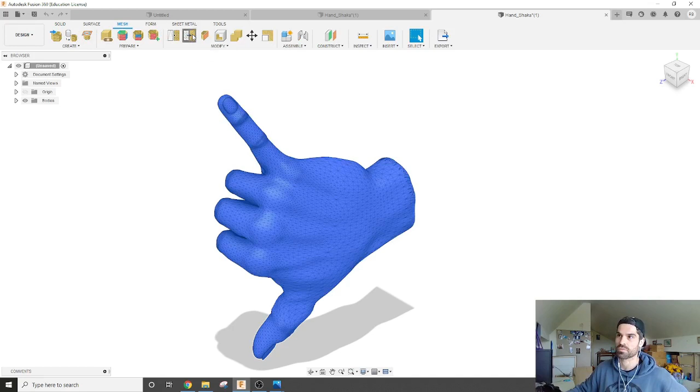So you go into your mesh, highlight the model, and reduce the mesh. Just from trial and error on the other ones, I found the proportion 17 works pretty well for how I want it to look—it kind of depended on the model a little bit. So there, I've reduced the mesh.

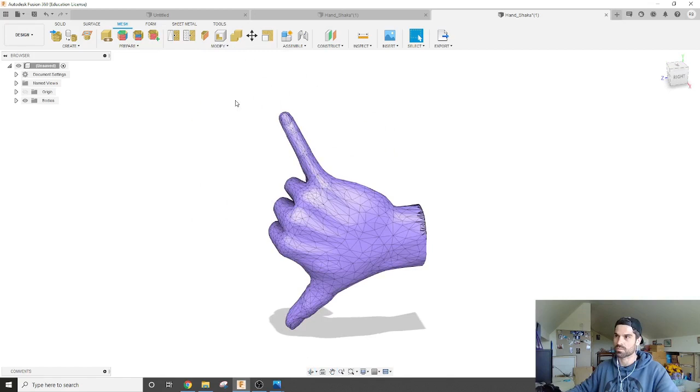We still can't put the hole in it or scale it to the size we want yet. First we've got to turn it into a solid body, and we do that by highlighting, modify, then convert mesh, converting it into the faceted body. You'll see the difference very soon.

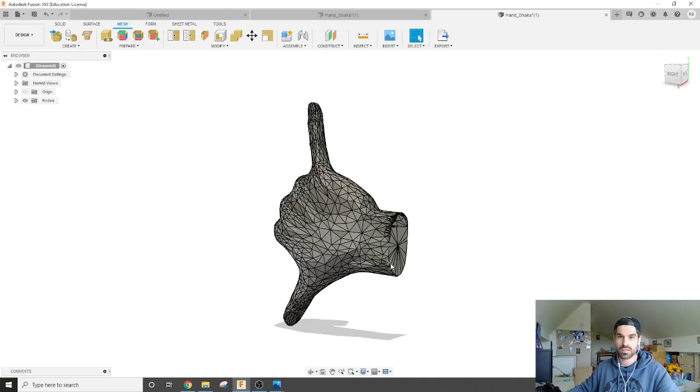From there we're going to scale it. At the moment that's our solid body that we could turn into an STL if we like, but I want to put that thread in still, and I want to make sure it's the right size. So you can just inspect and measure how big that is.

So it's 607 millimeters. With the peace one and this shaka fella, it was about 108 mil, and I know what that ratio is to convert it just from doing the math on it—not too difficult. I think it was 0.178.

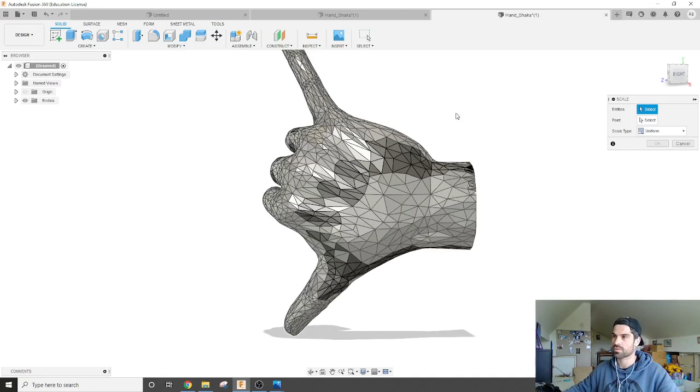So we're just going to scale it. We go over into our solid, modify, scale, select our model we want to scale. Then we're going to go 0.178—that's the size we want to scale it to for this one.

And if we do that measurement again, we get 107 millimeters, way closer into the ballpark of what we want. So that's all cool, leave it at that.

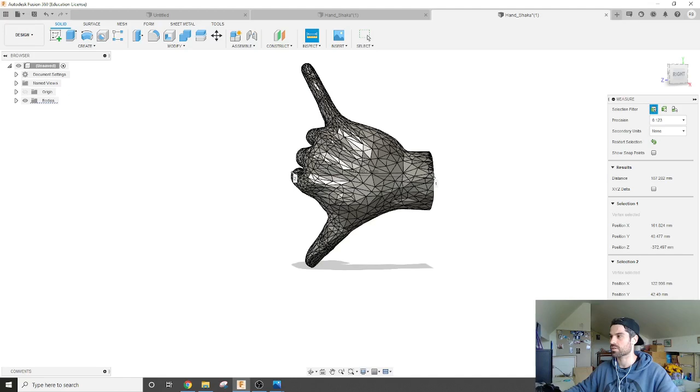Next we're going to put a hole in the base here for the thread. We go into our hole, select the center where we want it—you can move that pretty easily. Oh, my head's in the way, hang on.

So we've got a unified screw thread. I know it's a 3/8 for these taps, and we're going to go in 25 mil. So we've got our thread there.

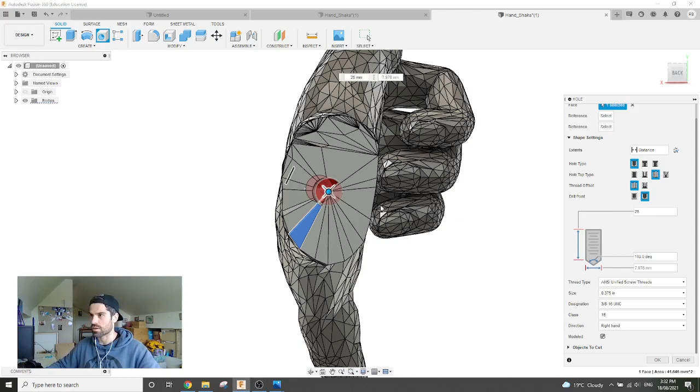Make sure you select modeled, because if you don't, it'll show up as a thread visually, but when you convert it into an STL it won't come through to print.

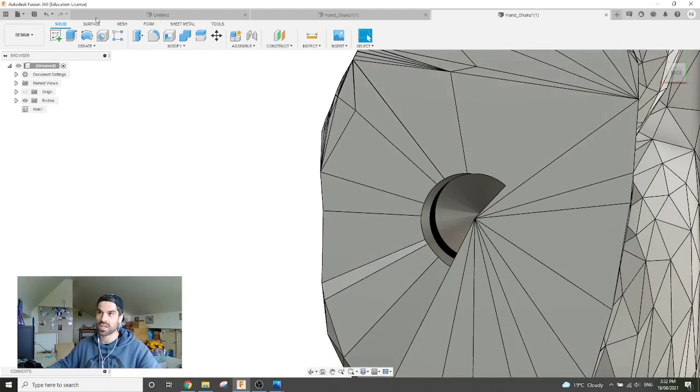There's a minor issue with this body—you see it didn't cut through this surface. So what I'm going to do is a sketch, a circle there, then extrude down just to cut out this part of the face, and then it should print okay. So we select about the size of that.

Finish that sketch, extrude that negative—0.1, should be 0.2 maybe, should get it all—0.325.

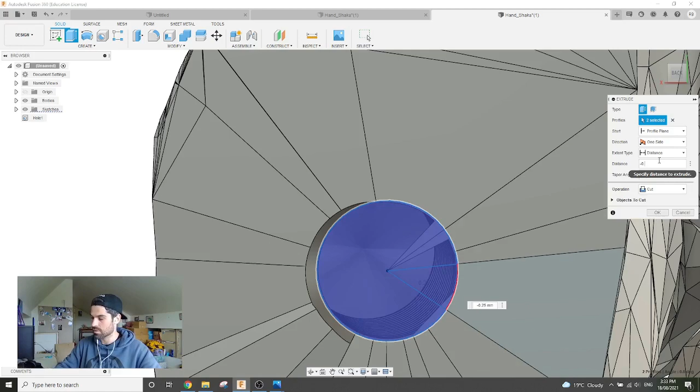See, we haven't cut through those—cut through those couple yet. I don't get those. Half a millimeter. We're going to cut through 0.5, minus 1 millimeter.

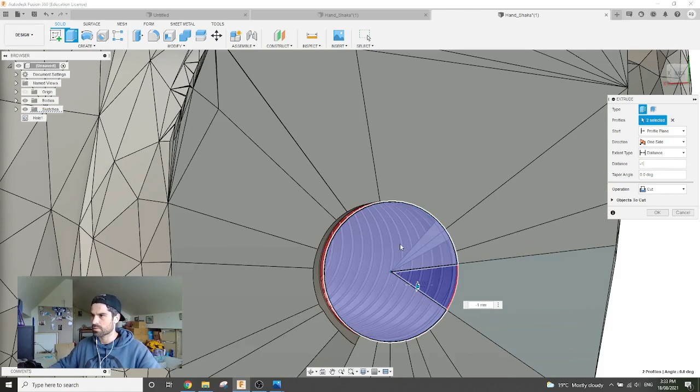Oh, we are cut through. Alright, let's go back to 0.2, 0.5. Okay, we still have these guys here.

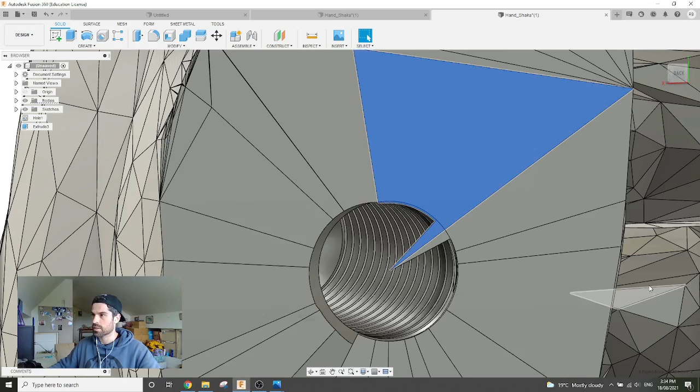I think they're actually above where we are, so let's create another sketch—circle, circle, base there. This is some of what you have to put up with when using an STL you find online—you're trying to adjust it.

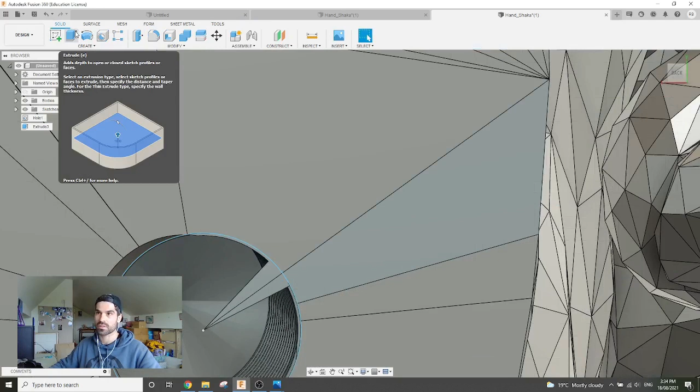So now we've got these two bits here, and we just want to cut through those as well. Yeah, there we go, awesome.

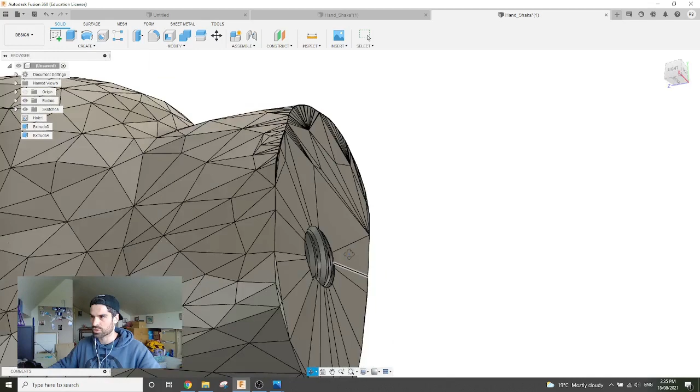So they're gone, so now we have our model that we scaled. It's a body, and we've got the thread there. Shouldn't have too many issues—oh, maybe that lip's going to be a bit of an issue.

So maybe we could just do another sketch, one more, adjust that as well—enter here. Yeah, there we go. Delete that, let's try one more time.

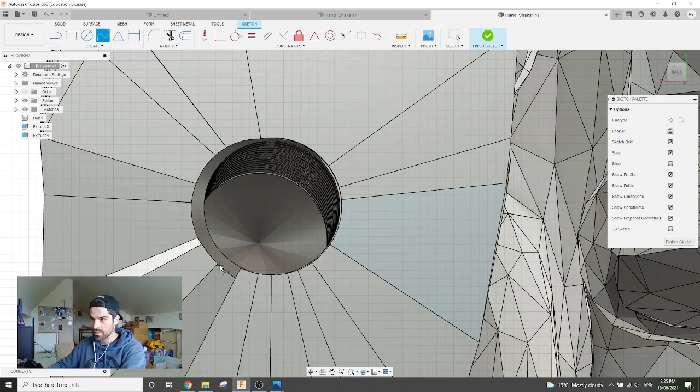You just do a line, follow this around—yeah, that. And we're just going to extrude that as well, just to fix up that little dangly bit.

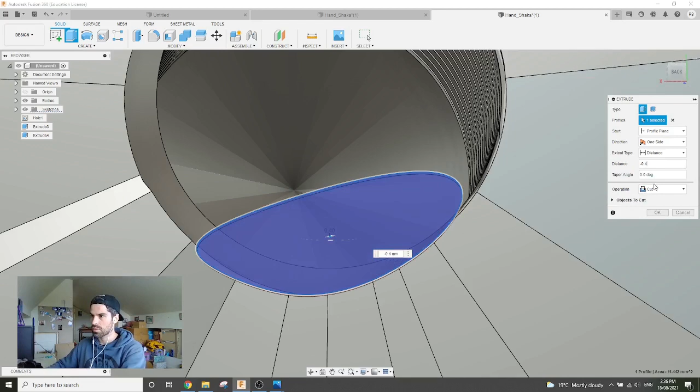Yeah, beautiful, look at that. And to cut into there a little bit isn't going to matter in the print—that's a tiny little bit, it won't even probably come out in our print.

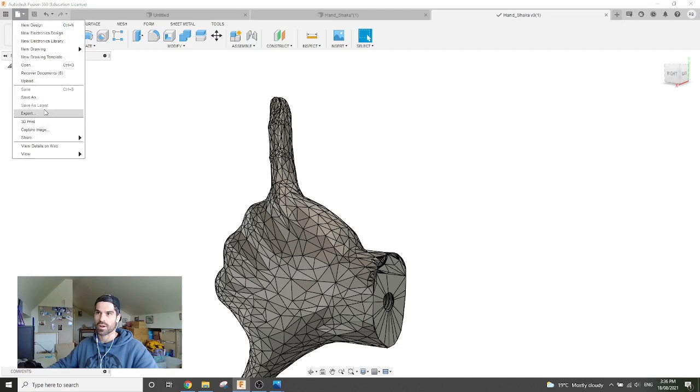So now we've got that model, got our thread. We just save it—shaka sounds good. Then file, export as an STL. This failed—it needs to upload to their server before it'll export. So let's try again, it'll take a little bit.

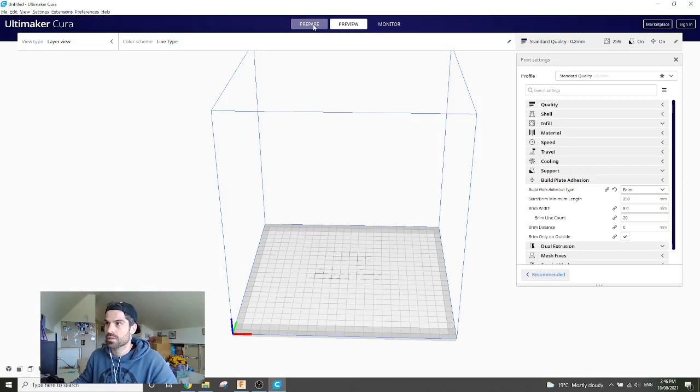Once that's done, I'll just import it into Cura and show you. So our shaka is complete, and all we have to do now is put it into Cura or whatever slicing software you're using.